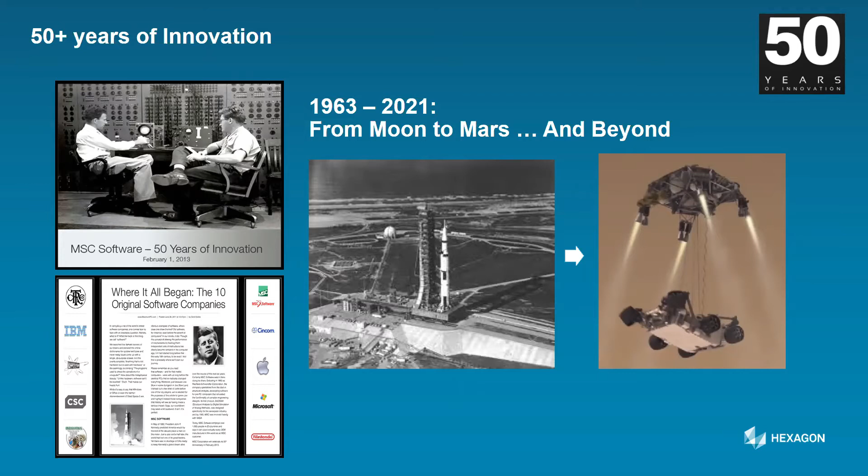When we look at the association, Hexagon MSC Software has been around since 1963. MSC Software as a brand came from NASA while the moon mission was announced. We have 50 plus years of innovation, and MSC Software is also one of the 10 original software companies in the world - I think the only simulation company present in this particular list. We were known to be more of a simulation company, having Nastran, Adams, Marc, Dytran, and a lot of tools used by pretty much all automotive, aerospace, heavy engineering and machinery companies, but very less known at that time for manufacturing simulation.

So what happened over the years is, from 1963 when it was founded, Nastran was actually the origin, coming from NASA. Then towards the late 90s is when a lot of nonlinear simulation and GUI-based analysis tools, most of these companies were acquired by MSC. From 2000 to 2009, mechanical dynamics, now within MSC called Adams, and most of the acquisition was driven towards multi-body dynamics and also development of enterprise level simulation tools like SimManager.

And then 2009 to 2017, practically we look at the acquisition of SimuFact, which is for simulation of manufacturing - it could be welding, forming, additive manufacturing, all of these things. 2017 onwards, the concentration has been on manufacturing related acquisitions, which is Amendate for generative design, for additive manufacturing - we call it DFAM, design for additive manufacturing - and then FTI, which is for forming, that is sheet metal forming analysis, and then a few other things like fatigue and rotating machinery design, Romax, and all of them.

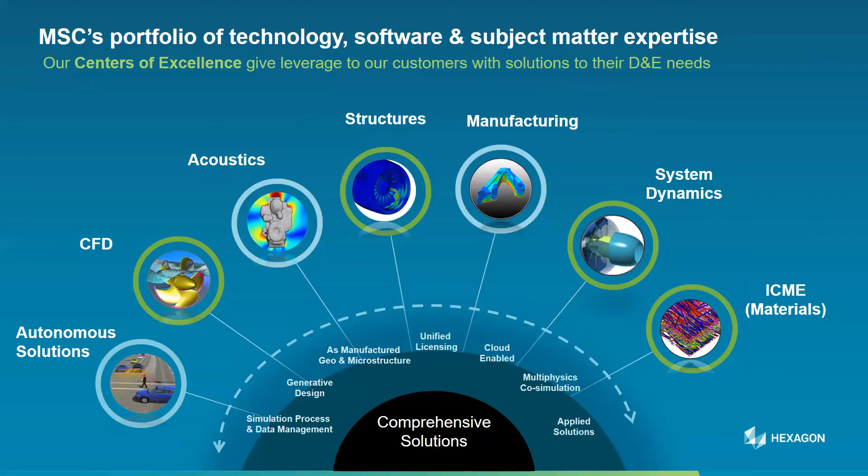Let me start with what we are offering when it comes to the manufacturing industry. If you look at our expertise, we have solutions starting from CAD CAM, starting from capturing the data. That again we talk about metrology and measurement, then the software solutions. In today's world, if you look at the manufacturing industry, to give an overview of our presence - if you look at Hexagon technology usage in car production, 75% of cars produced today use Hexagon solutions, and 90% of aircraft components produced use Hexagon solutions.

The smartphone production is where we have 85% of our technology used. Looking at what we are really doing, starting from the CAD to the quality, we have a different solution, even the manufacturing process that includes forming, welding, and additive manufacturing.

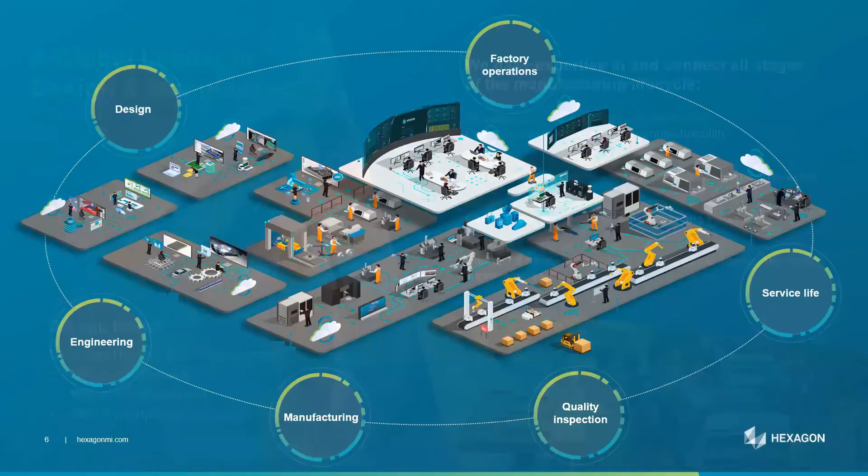Today we look at how we are contributing when it comes to additive technology. That starts from the design stage, starting from engineering, then we talk about design, then we go on the manufacturing side, then we look at the service life of any part which is 3D printed, and then we talk about quality.

We do the re-inspection or post processing of the 3D printed part. What we're trying to do by connecting all these dots is, when we talk about engineering, we don't want engineering and design to be separate. When I design my part, I have to consider all manufacturability or manufacturing principles during the design stage itself, so I can come up with a design that is more realistic and considers ease of manufacturing. Then I also talk about quality and services.

If I can bring all these concepts into the design and engineering stage, whatever design comes out considering all these aspects will be right the first time. I also make sure that the lightweighting or design modification I do is qualified at each and every stage, including build, quality, and service life.

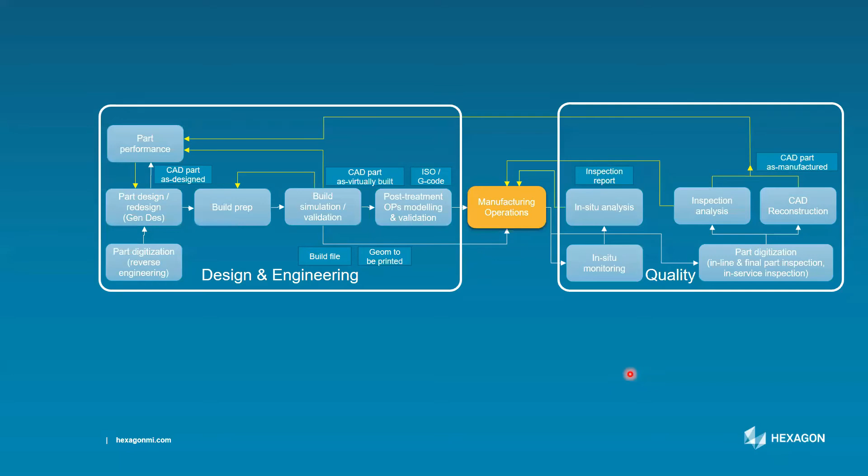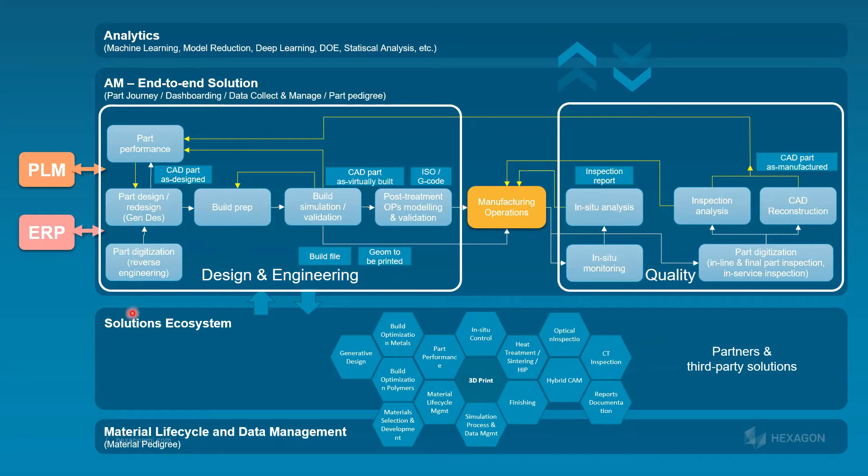Let's look at what we offer and how the complete workflow stands. When I say end-to-end solution for additive manufacturing, you might already be working with a couple of PLM or ERP software. We have solutions where it can fit into the existing solutions available in your industry, so within the existing system we talk about 3D printing.

There are a lot of prerequisites, and a lot of work has to be done for 3D printing. We have to start with design optimization, then find the best orientation to print the part without any defect. Then we talk about using different printing materials - plastic, polymer, metal - and selection of the best material based on performance. Then we talk about material lifecycle management. This is mainly the prerequisites for 3D printing.

We are not only focusing on the 3D printing aspect but also what we do after 3D printing, like post-build operations. We can simulate and understand the deviations, and generate post-build operations like machining and heat treatment based on the stresses we obtain during the 3D printing process. Then we can inspect the internal cracks that occur due to density related issues during 3D printing.

The whole end-to-end process, starting from design to quality, can be studied in the digital world. We can also run in parallel with the digital and real world, where I can print a part, get it scanned, do a best fit over my design, and understand where the deviations are. Then I can give machining allowances based on the deviation. This whole digital twin process can be run in the digital world as well as with physical trials which we do on the shop floor.

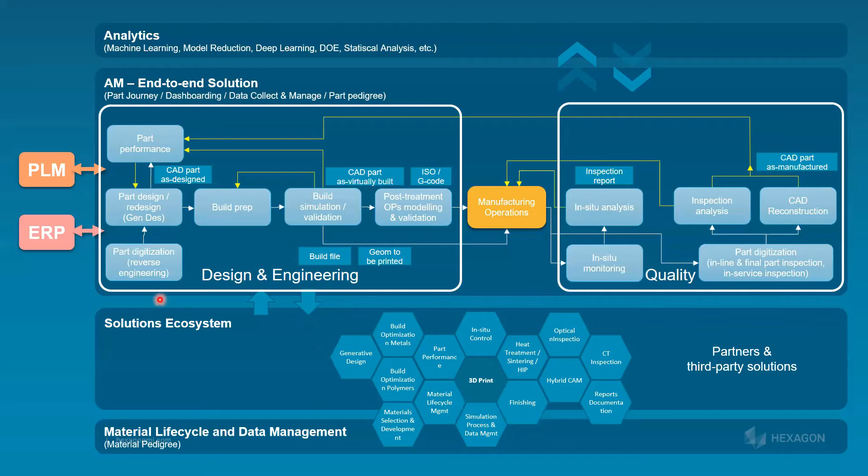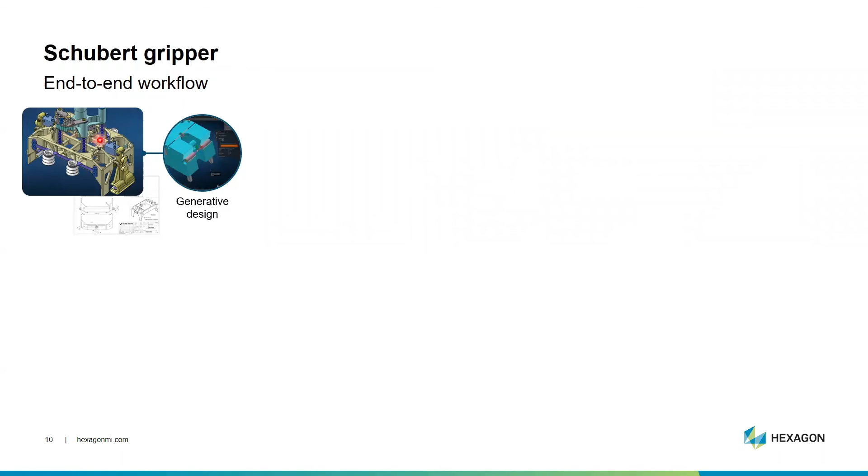Let's look at one case study, where we started from design optimization, then material selection, and then digitally understand how it behaves with different process parameters, materials, and performance levels. Let's start with understanding the initial requirement. We were working with one assembly where we wanted to reduce the weight of a gripper. Initially we started with understanding the critical loads coming over there, which is quite important from an assembly and performance point of view.

So then we designed our complete optimization process considering the remote loading, design space, and non-design space. Once we could optimize that, we went into the performance. When I say design optimization, I end up with multiple designs, so until I know the performance of each optimized geometry, I cannot select the best one.

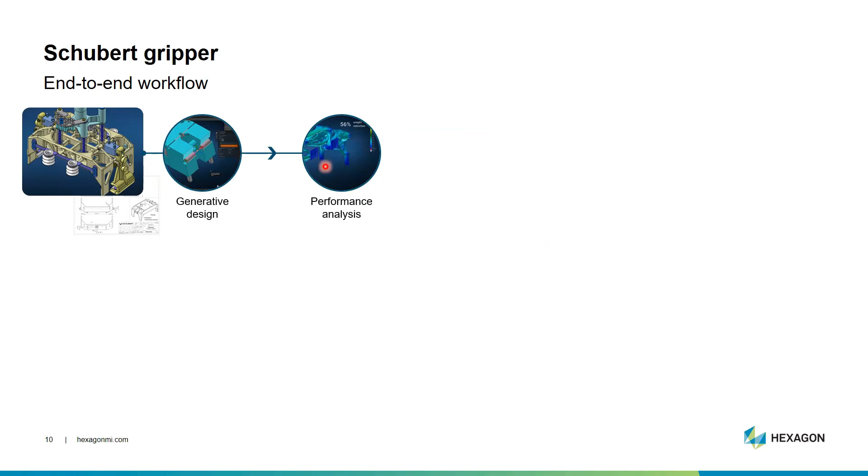I need the performance detail or durability test done on each design. So what I do is perform the optimization, then go for performance analysis, then an actual manufacturing process simulation. It's quite important, since not every design is easily printable. There will be a lot of challenges when it comes to printing or manufacturing with different technologies, whether additive manufacturing, sheet metal forming, or any other manufacturing type.

Once I have manufacturing process simulation results, I can consider the residual stress coming out of this operation and go back to test what will be the performance of my part. This allows me to choose the best design that is easily manufacturable, and also gives better performance.

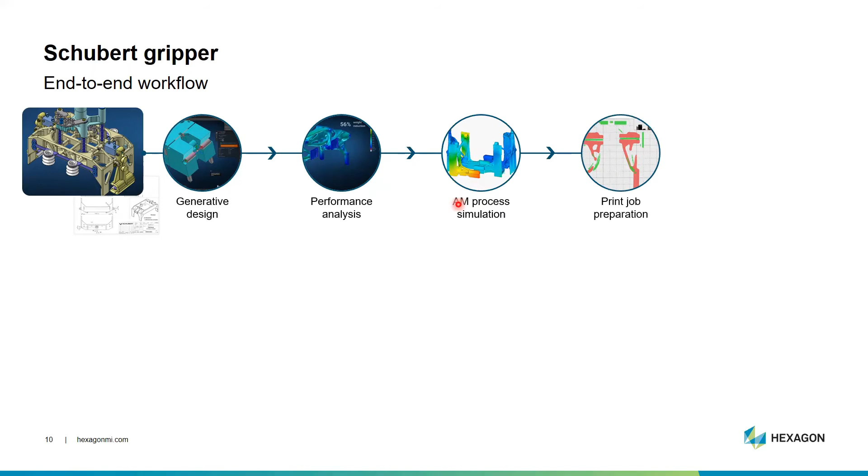Then I can go for an actual printing process with optimized printing parameters, optimized orientation, and support structure. Once we print, this is not the end - once we manufacture it, we can scan the physically printed part and take those results back into the software.

We have software that can convert our cloud data directly into a CAD file, so there's no manual effort for CAD modeling or retransition of this cloud data into a CAD model - the software handles it easily. Whatever scan file format, or cloud-based data, can be easily transferred to the CAD model.

Then we can inspect the quality in terms of the initial design and how much it deviates from the original design, which helps us understand where to give machining allowances considering the deviation from the original design.

Then we can also inspect internally, do further modification, and inspect internal cracks. We have software called Volume Graphics, so once we print, we can do internal crack analysis, which helps us understand why the crack was generated or if there's a density-related issue.

If further modification is required, it can be done based on the defect found during the manufacturing process. From there, we can take that back into the CAE analysis, considering the deviations and actual conditions, and further estimate the durability or life of the component.

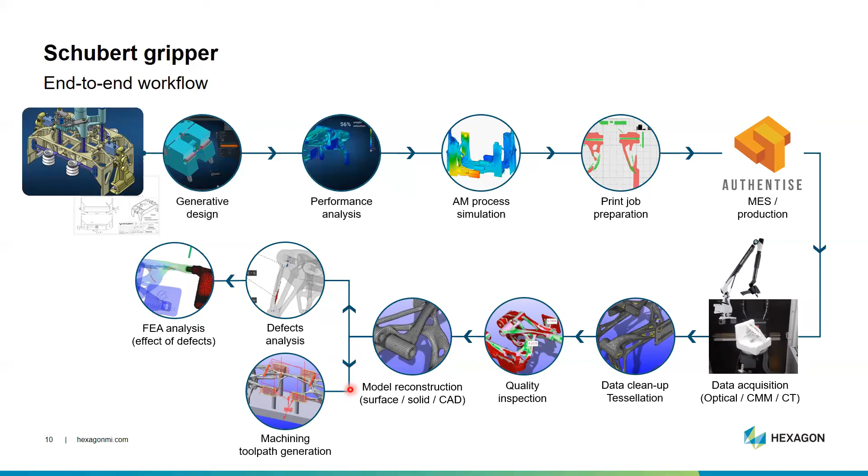Then coming to post-processing, once we have all this quality information, we can design our machining path to fit into the actual assembly. We can even simulate and understand what the machining path should be and the effect of material removal on the final part quality.

If you look at this complete workflow, we started with understanding the initial design, then did the lightweighting, then the performance analysis, then the manufacturing process feasibility. We not only checked manufacturing feasibility but also optimized for controlling distortion, providing the best orientation and support structure. Then we could print and inspect the part.

Many solutions can only do it up to this point, but once we print, we could also inspect and further modify the post-build parameters. Overall, this process was done with two different materials, because in additive manufacturing, the material can be plastic, polymer, or metal. We could simulate and understand both materials, and run this process with different sets of available materials.

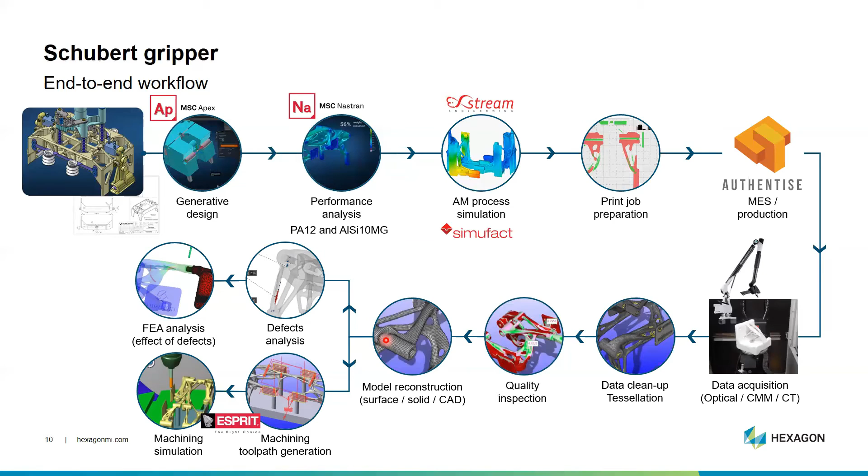So now let's look at what we have done. Here, if you look at our complete workflow, we have started from understanding the initial design.

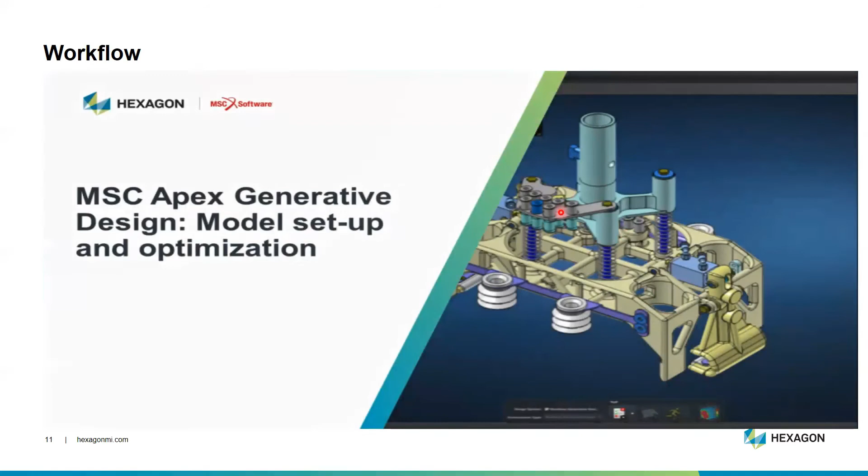So this is the initial design, imported into Apex Generative Design, where we defined the design and non-design space for the topology optimization. You can clearly see how simple the tool is, you can just define your design and non-design space with a few clicks.

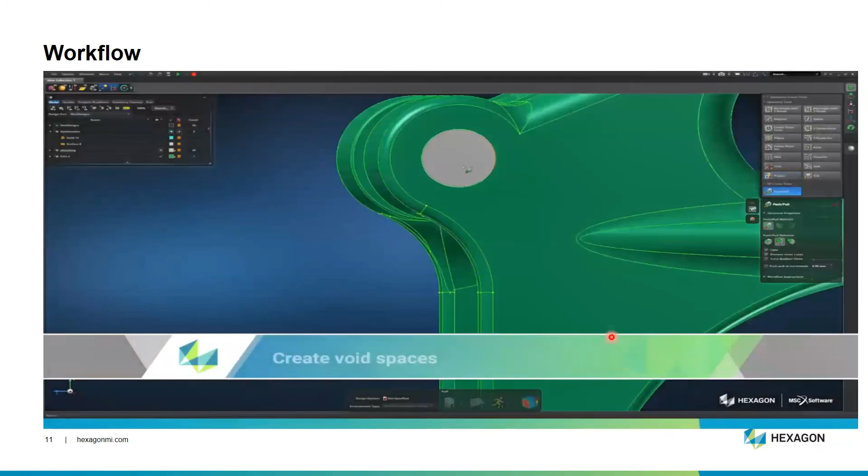Then I'm applying remote loads, and then I put constraints where I don't want to really remove the material, or where I don't want to do the optimization.

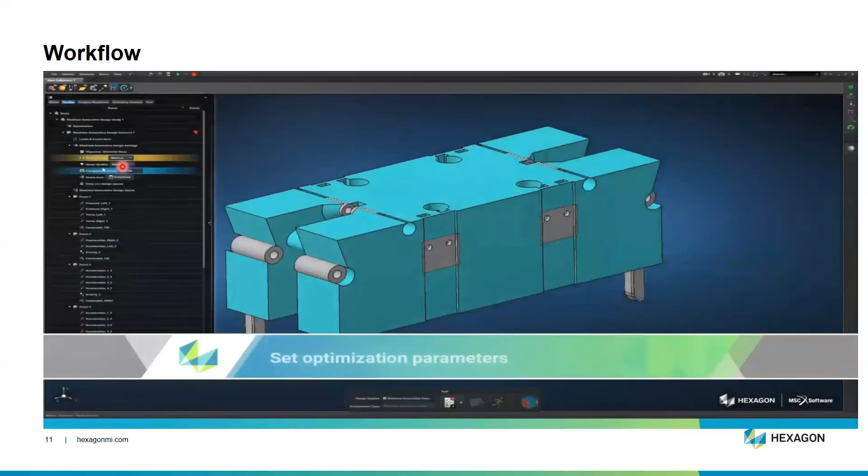Then I'm defining my design criteria, like what is my optimization goal in this process. Once I have this complete process defined, now I can see the weight reduction or optimization of the initial design.

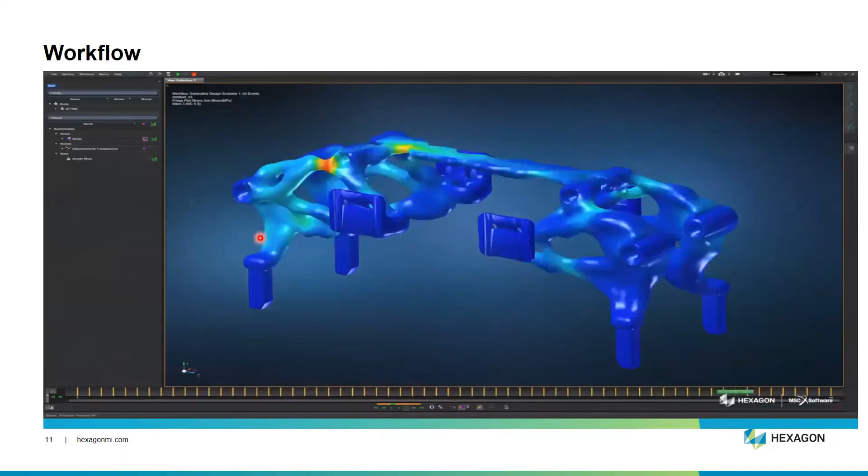Once I have this optimized result, what I do is I will take this into Nastran. So I have the design with 56% weight reduction.

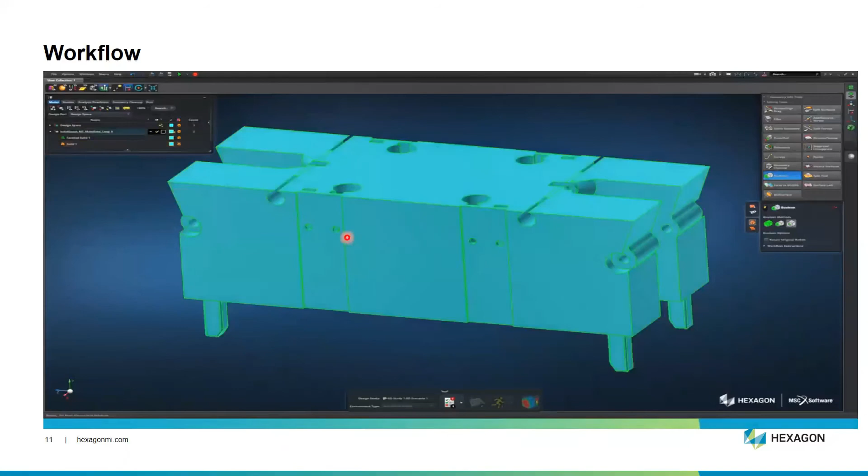Greater advantage here - once I have optimized it, I can export this optimized geometry in any CAD file format. It need not always be STL. I can export it into Parasolid, I can export it into STEP file format, so that it will be easy for us for further modification.

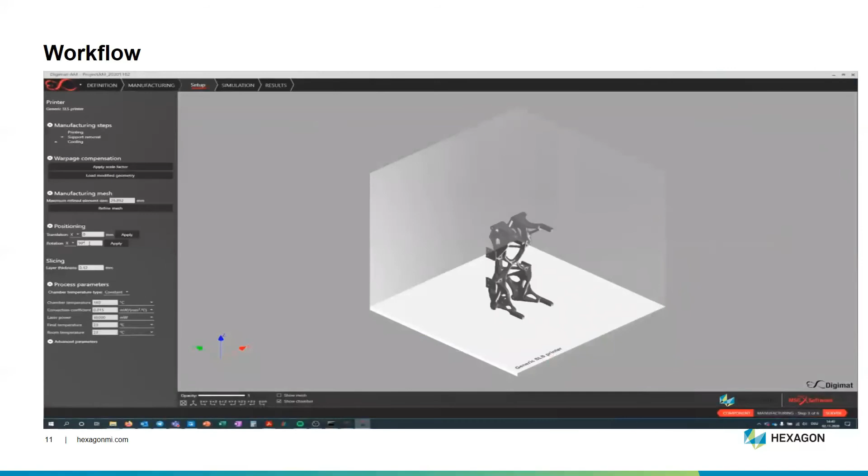So now I will import the same model in Nastran. Once we validate our structural aspect, I'm going for Digimat, where I use polymer or plastic, and polymer 3D printing material, and I could check whether I can manufacture this optimized design using plastic and polymer material. I can also understand what challenges or defects I'm going to face during manufacturability, in our 3D printing stage.

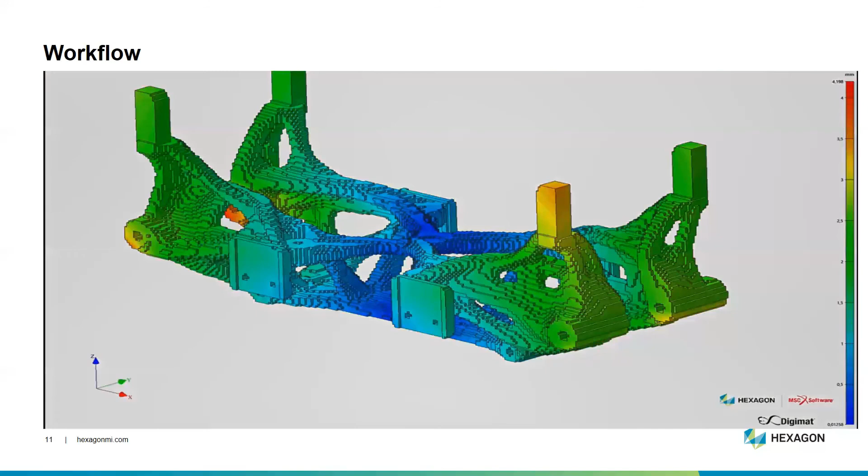I can also further optimize using Digimat software. Now I will use the same design for a metal part. When I say metal, I can further optimize by reducing the weight, like making it a further lightweighted part.

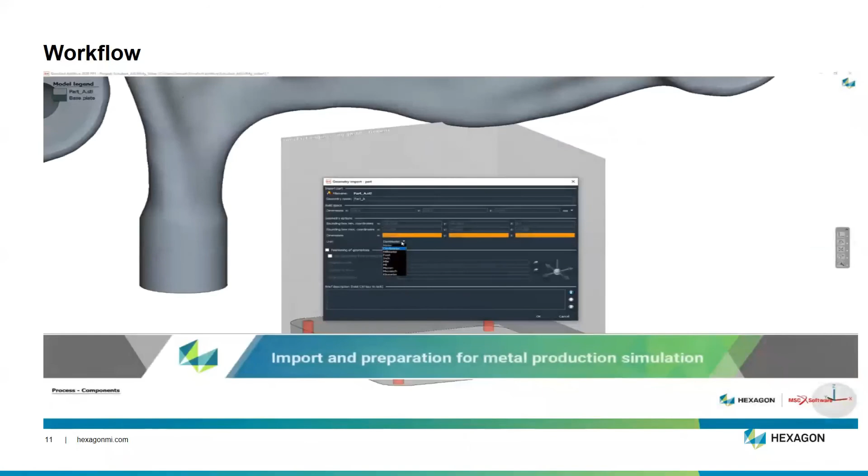So now, once I optimized considering the metal component, I can take it into Simufact Additive to understand how best we can orient it and what support structures are needed in terms of getting it printed without any manufacturing risk.

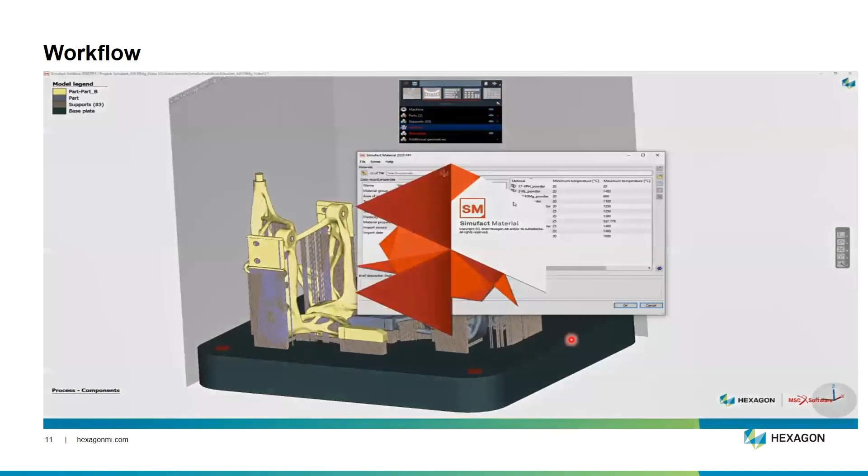So here it clearly shows how we can orient it with the given machine conditions. We can also see how the 3D printing process will happen, like how the part is really getting printed in the 3D metal printing environment.

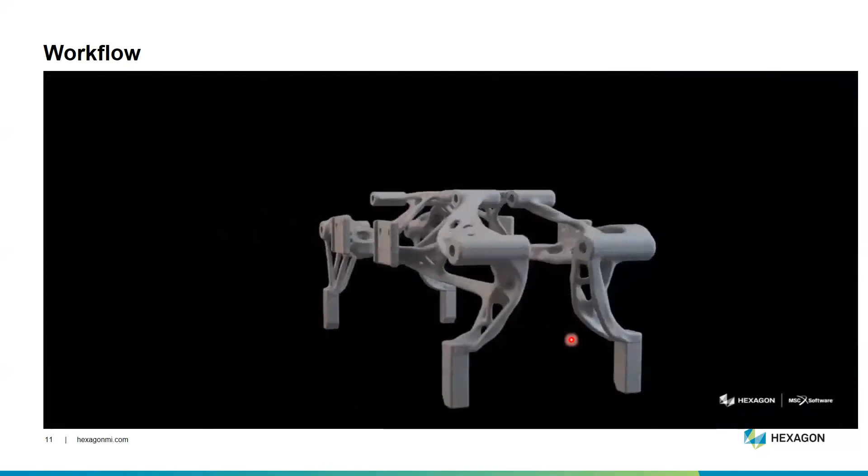So this is the final geometry. With the same optimized design, when you print with plastic material versus when you print with metal, this is how the design could vary. Even if you look at these two designs, the same optimization process was run with plastic and metal material consideration, and then we checked the durability of this.

Then we could further optimize considering the design condition. The whole of this optimization process could be calculated in just 18 minutes.

So this is quite an automated optimization process tool. There is no manual remeshing, there is no geometry correction - the software will completely handle the remeshing, the geometry transition, and cleaning of the geometry. It can optimize and give you the geometry which you can directly use for 3D printing applications.

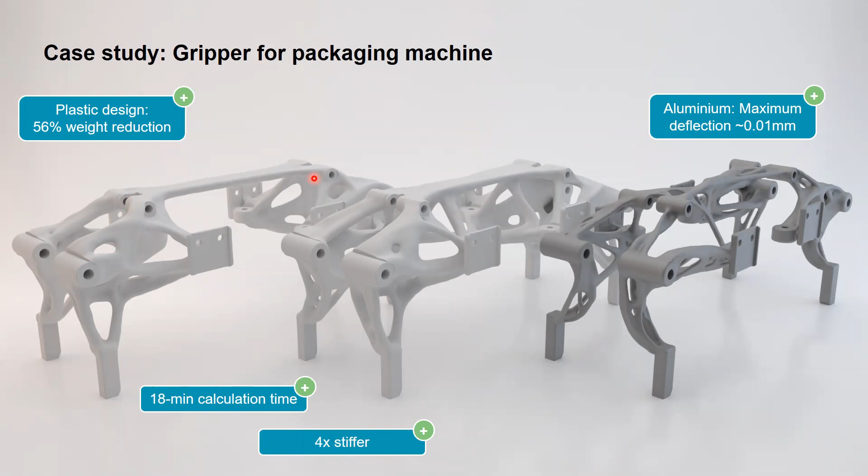So even for physical printing, it can also be used for any further analysis in any CAE tool. Overall, we started with the initial design, did the optimization, then tested the performance. We also understood how it can be manufactured using different materials and its performance.